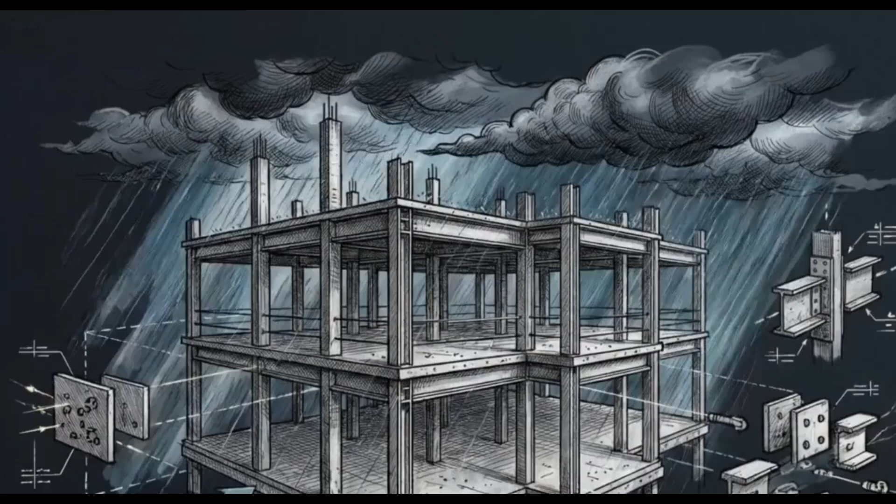A building is never at rest. From the moment the frame goes up, it is locked in a physical fight against gravity, wind, and time.

On a professional job site, these structural principles function as legally binding obligations, moving structural stability from a design choice to a statutory requirement. That legal framework operates as a strict hierarchy.

At the absolute top is the Building Act 2011. This is the ultimate statute in Western Australia, providing the legal mandate that a structure must be safe and compliant.

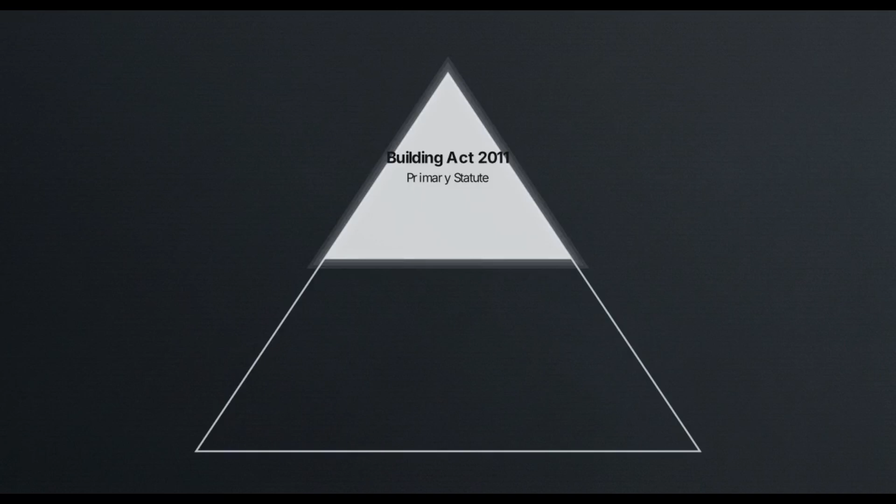Directly beneath the Act are the Building Regulations 2012. These define the exact legal pathways, certification requirements, and conditions necessary to actually obtain a permit.

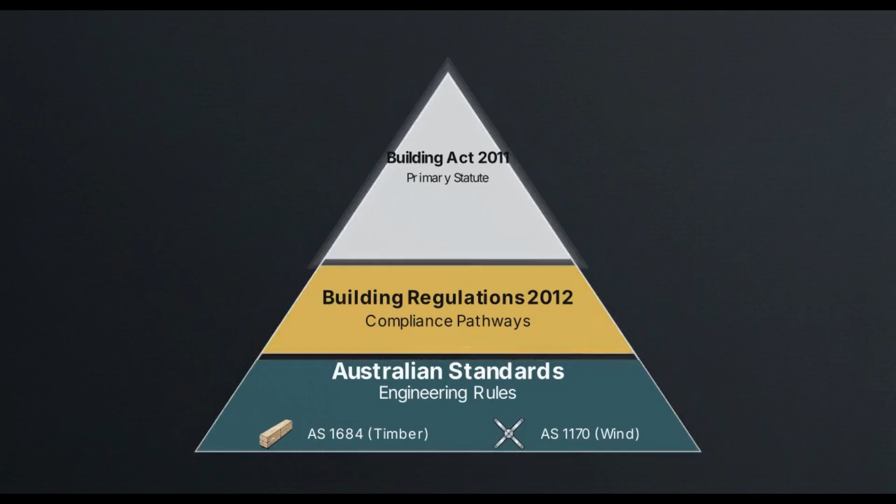Forming the foundation of this pyramid are the Australian standards, documents like AS 1684 for timber framing and AS 1170 for wind actions. These provide the specific, engineered math that dictates how you must physically construct the building to meet the regulations above it. A structure's physical survival on site and your legal survival as a builder depend entirely on satisfying this regulatory hierarchy from the ground up.

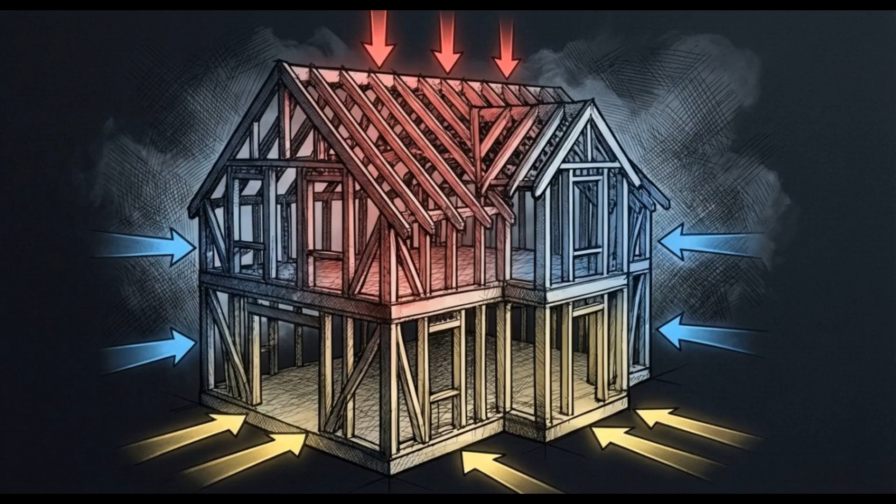To satisfy those standards, we have to quantify what the building is fighting against. In engineering, a force is the action, a physical push or pull. A load is the resulting weight or pressure that the structure actually has to carry.

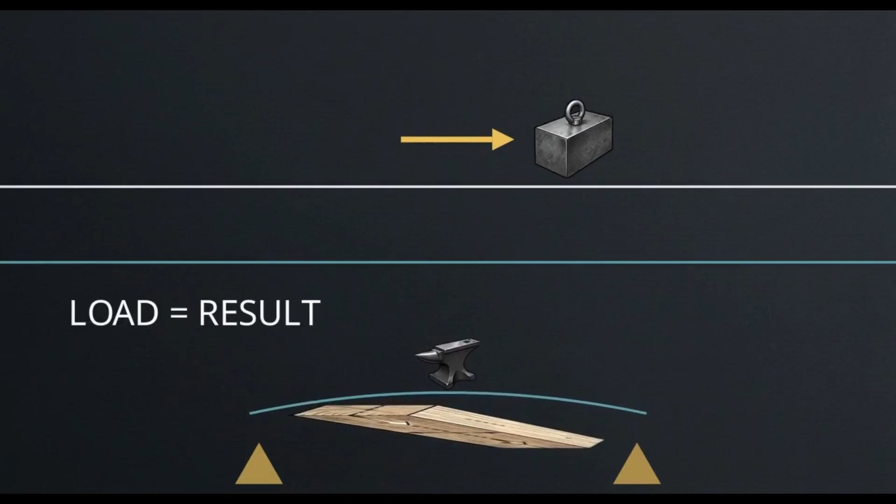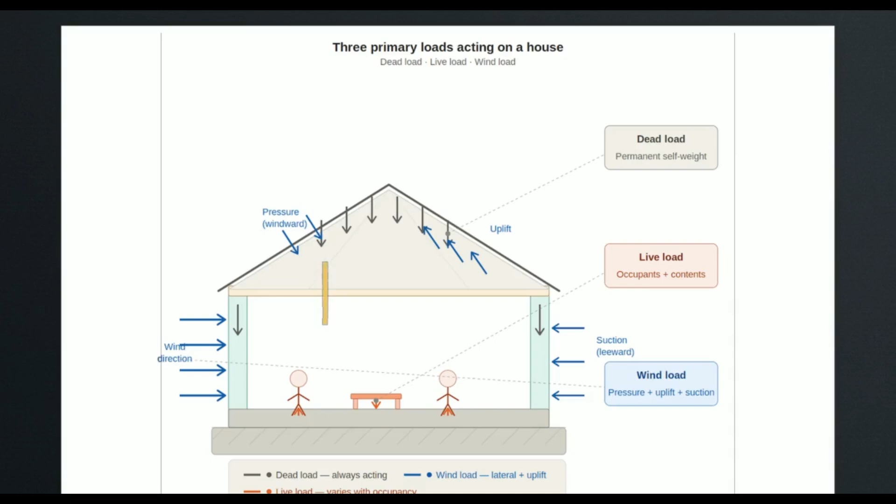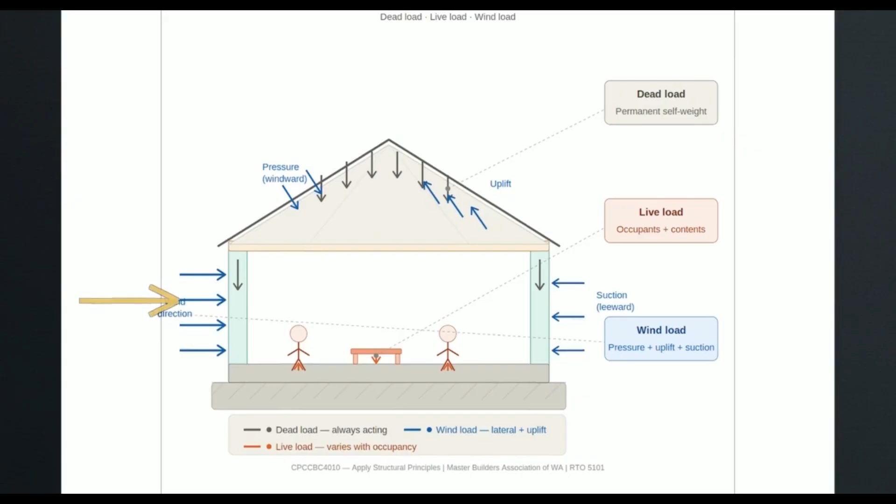Primary loads act on a house as invisible forces that never sleep. Every structure is designed to handle these by default. Notice the specific directionality. The dead load, the permanent weight of the materials, and the live load from occupants both push straight down. But wind load acts laterally, pressing against the walls and creating massive uplift on the roof.

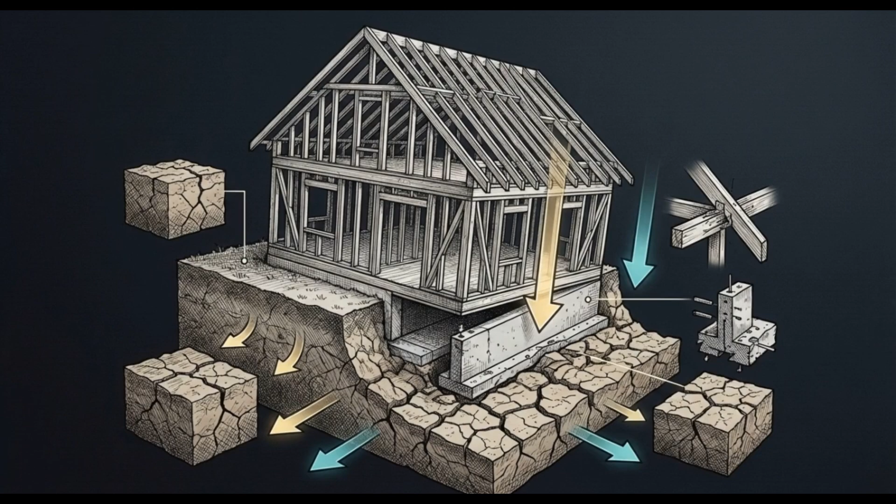For example, building in Western Australia's reactive clay soils introduces severe settlement loads as the ground swells and shrinks. If you're pouring a basement, you must engineer for hydrostatic pressure, the crushing weight of groundwater pushing horizontally against the submerged concrete. A builder's very first responsibility is identifying and calculating the exact combination of these loads before a single trench is ever dug.

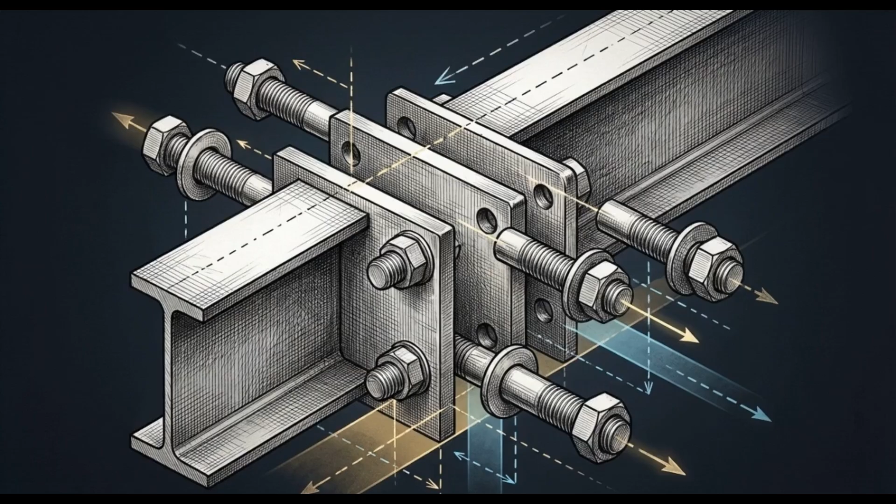Once you know the total load on the building, you have to manage how those massive forces interact at the micro level, specifically at the connections.

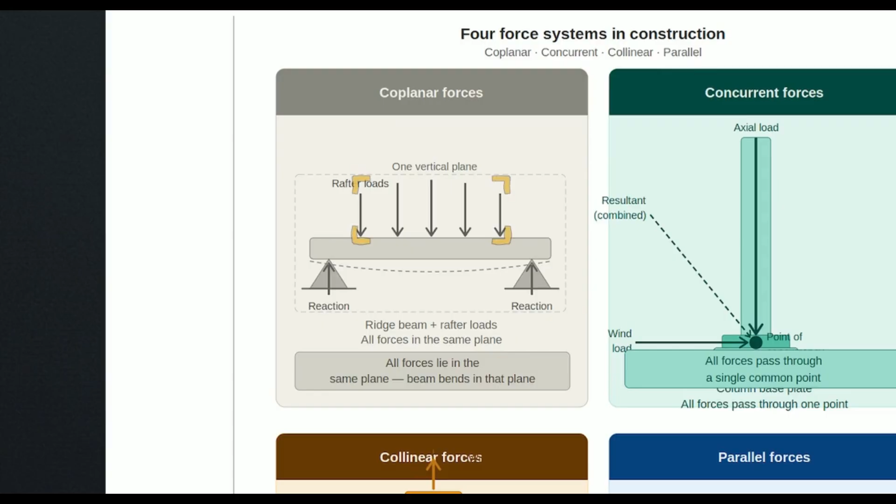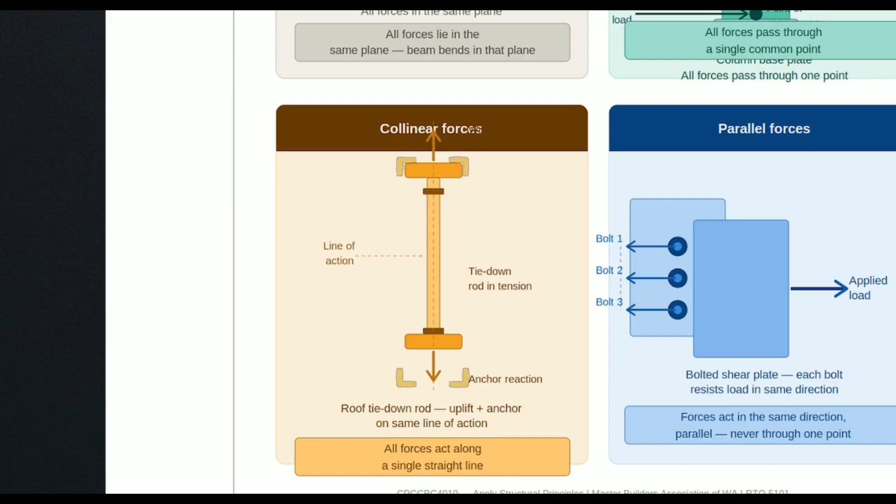Look at the top two panels. When forces act along a single flat surface, they are coplanar, like rafters on a ridge beam. When multiple forces meet at a single base point, like weight on a column, they are concurrent. Collinear forces act in a single straight line, like tension on a tie-down rod against wind uplift. Parallel forces act in the same direction without ever intersecting, which is exactly how a bolted shear plate distributes its load.

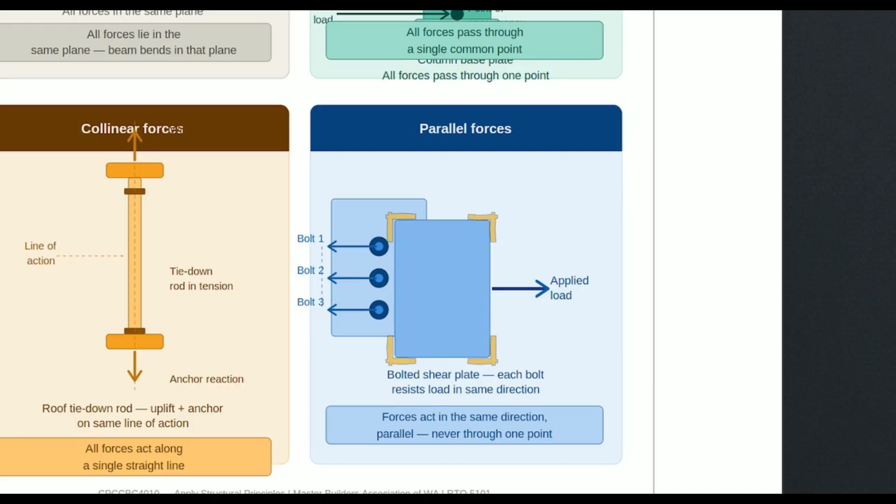Whenever these forces are applied to a horizontal beam, the material will physically bend. This movement is called deflection.

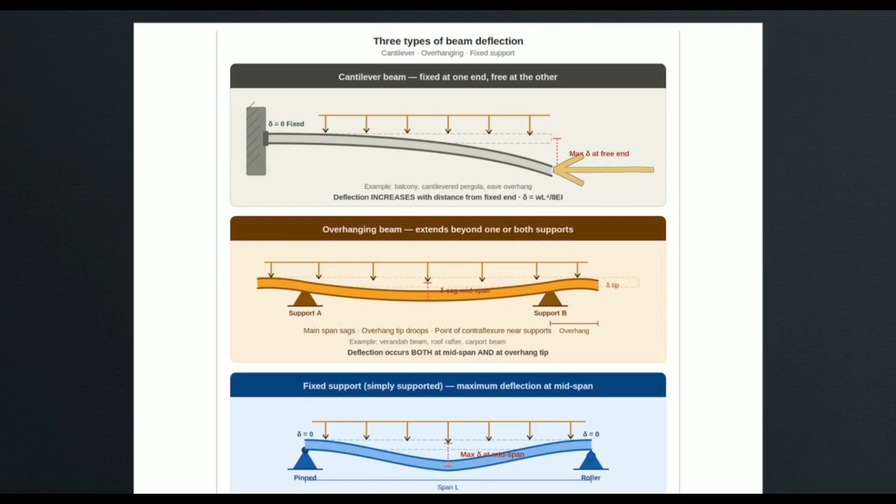This diagram shows a cantilever beam, fixed at only one end. Because the other end is entirely unsupported, the absolute maximum stress and downward movement occurs at that free tip. Contrast that with an overhanging beam, which sags in the middle while the tip droops. A fixed support beam, pinned at both ends, experiences a symmetrical curve, with the maximum deflection occurring exactly at mid-span.

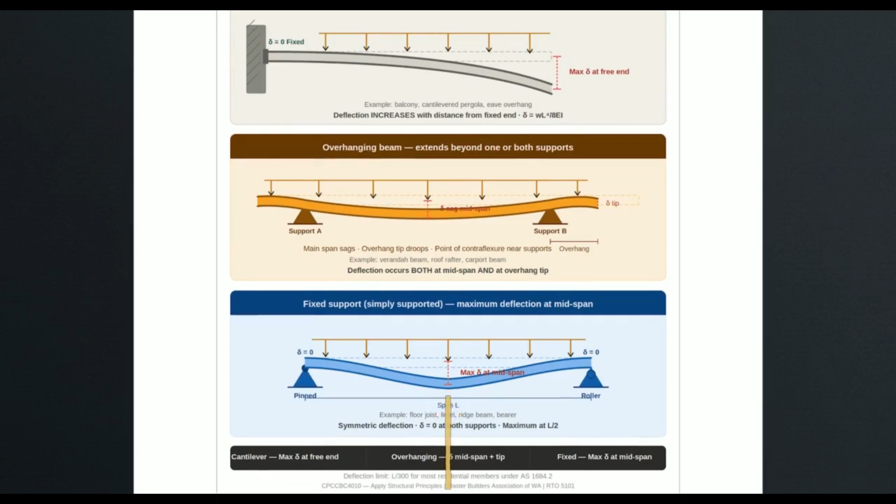Deflection is an inescapable reality of physics. The goal of structural engineering is not to eliminate the bend entirely, but to predict it and restrict it within the strict allowances of the building code.

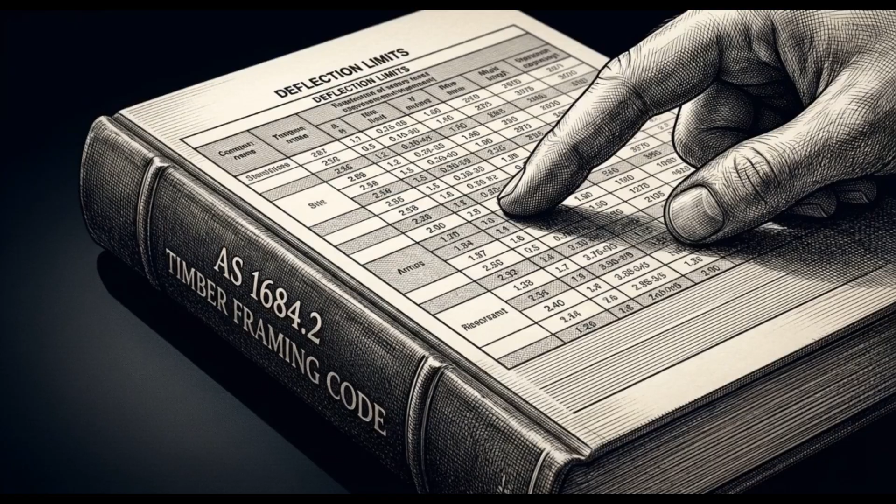To restrict that bending, simply increasing material volume is inefficient. Strength is dictated by geometric orientation. Every beam has a geometric center called the centroid or neutral axis. This is the exact midline where the crushing compression on the top of the beam and the stretching tension on the bottom meet and cancel each other out.

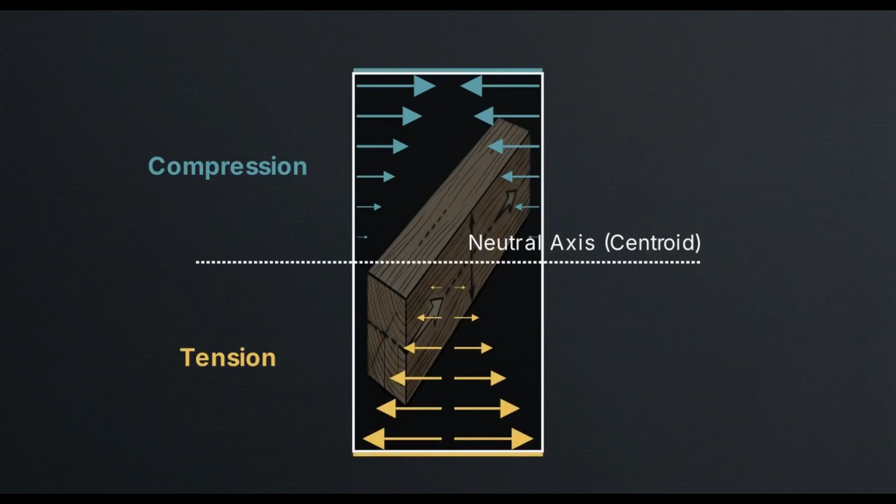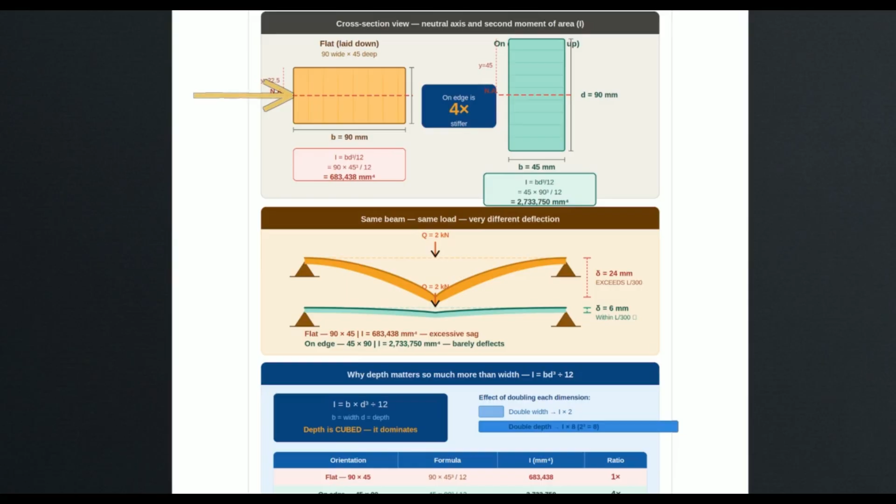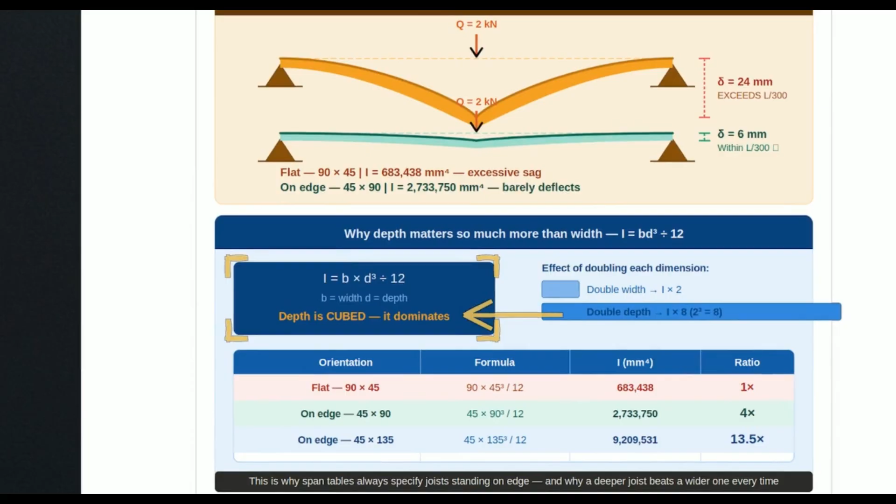The mathematical formula for inertia divides the width times the depth cubed by 12. Because the depth value is cubed, it completely dominates the equation. Rotating that exact same piece of timber onto its edge makes it 4 times stiffer.

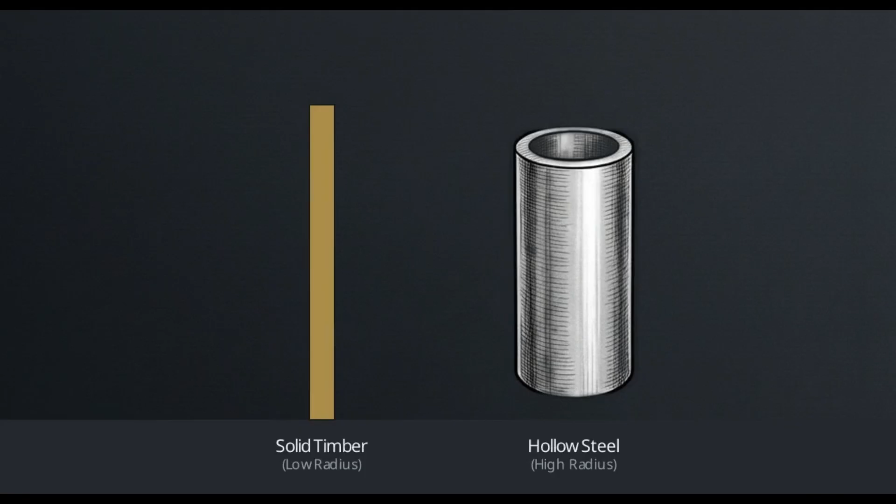A similar geometric principle applies to vertical columns. The radius of gyration measures how effectively a tall, slender column can resist bowing outward when heavy compression hits the top. Manipulating geometry, rather than simply buying thicker timber, is the ultimate secret to structural efficiency and cost control on site.

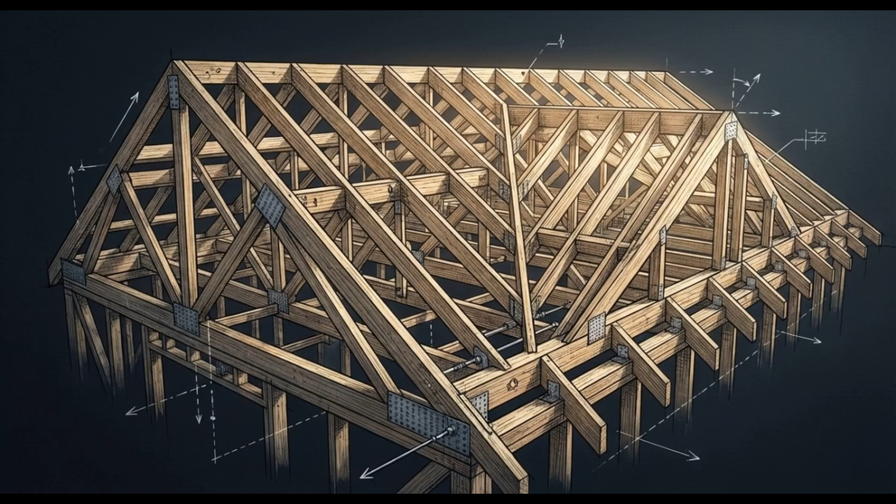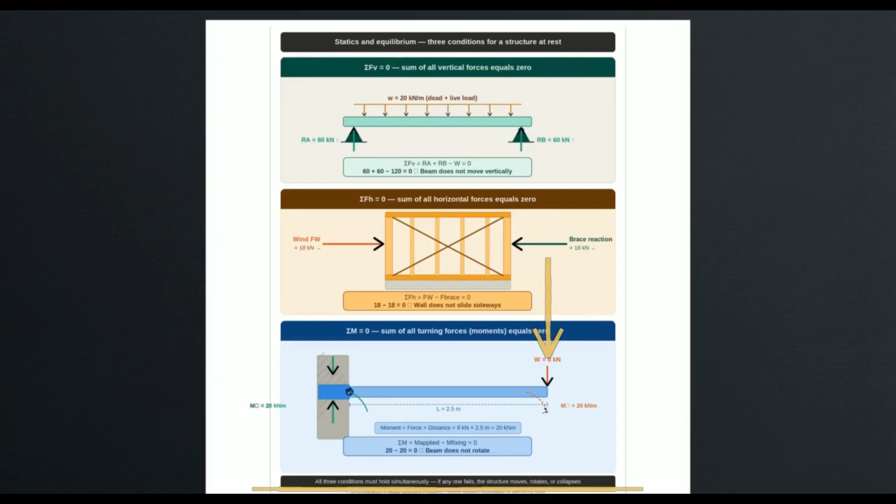Turning moments are calculated by multiplying the applied force, here 8 kilonewtons, by its physical distance from the pivot point, 2.5 meters, resulting in a 20 kilonewton meter turning force.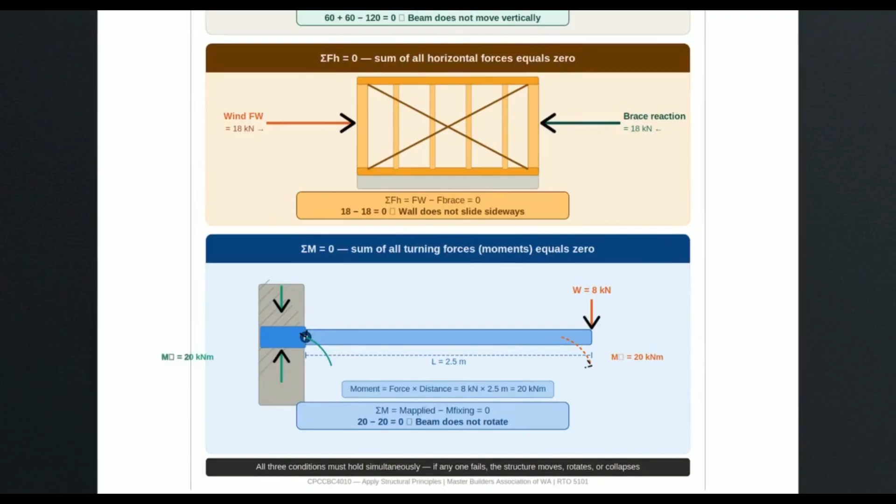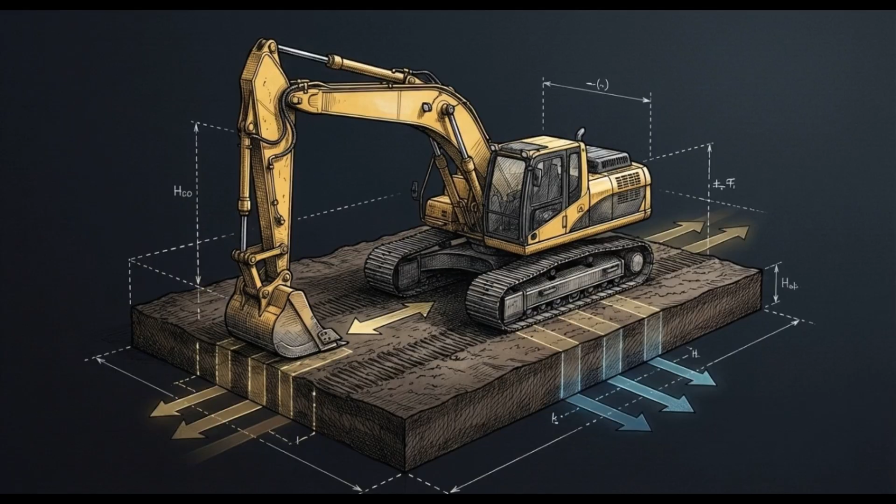These theoretical equations translate into hard numbers on site. For example, a soil base with a bearing capacity of 100 kilopascals can safely support roughly 10 tons of load per square meter. To maintain that equilibrium, building materials must absorb 5 distinct physical stresses: tension, compression, shear, bending, and torsion.

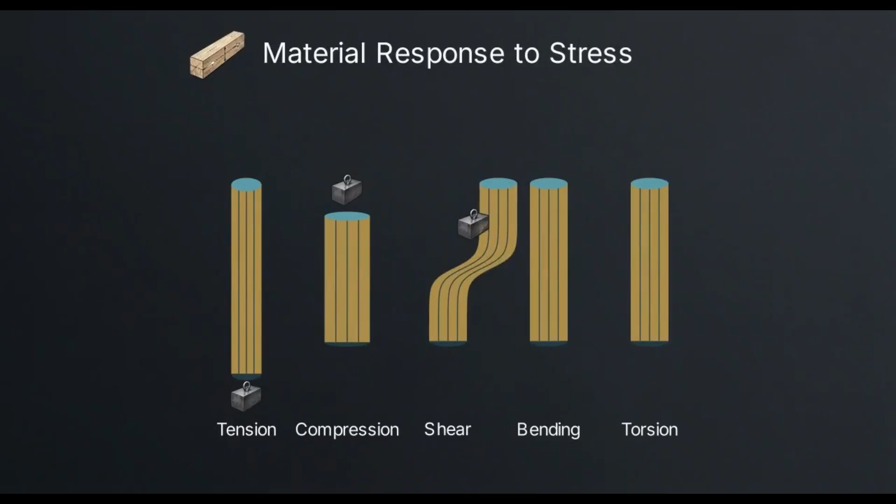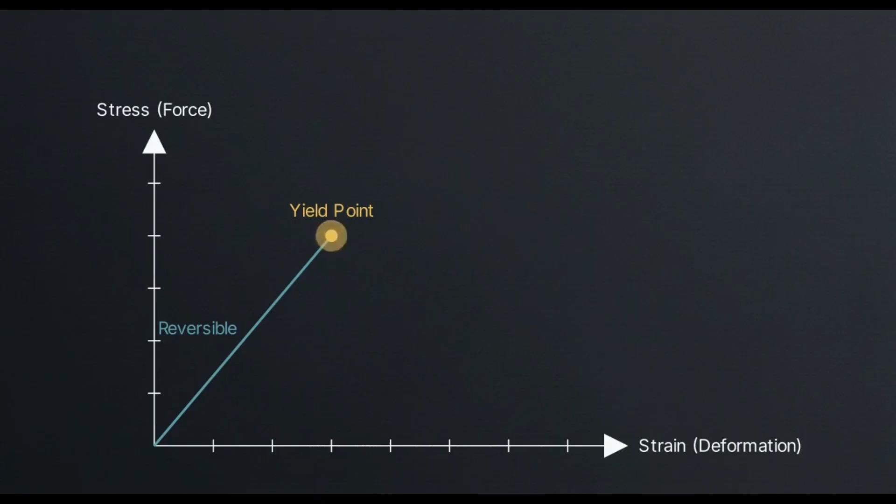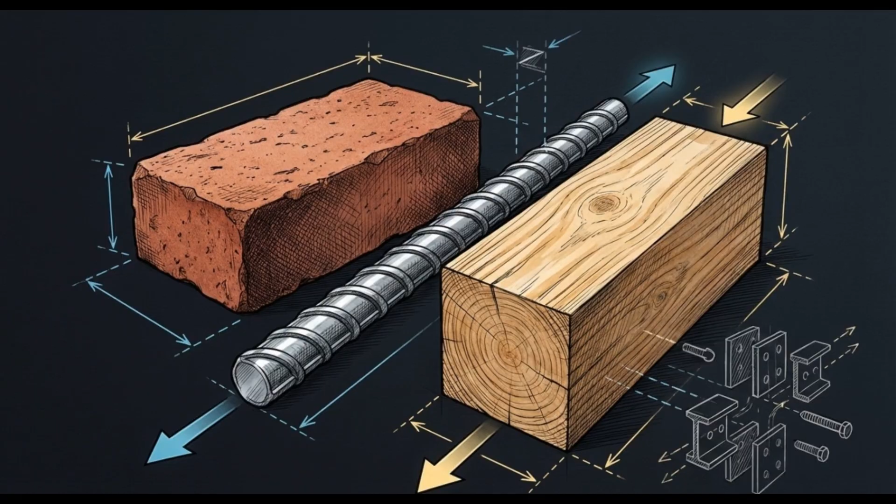Materials map their resistance on a stress-strain curve. Initially, they operate in the elastic zone, bouncing back when the load is removed. But if they cross their specific yield point, they enter the plastic zone, suffering permanent deformation until they reach catastrophic fracture. In construction, there is no perfect building material. Great engineering relies on matching a specific material's yield point to the precise loads demanding equilibrium on your site.

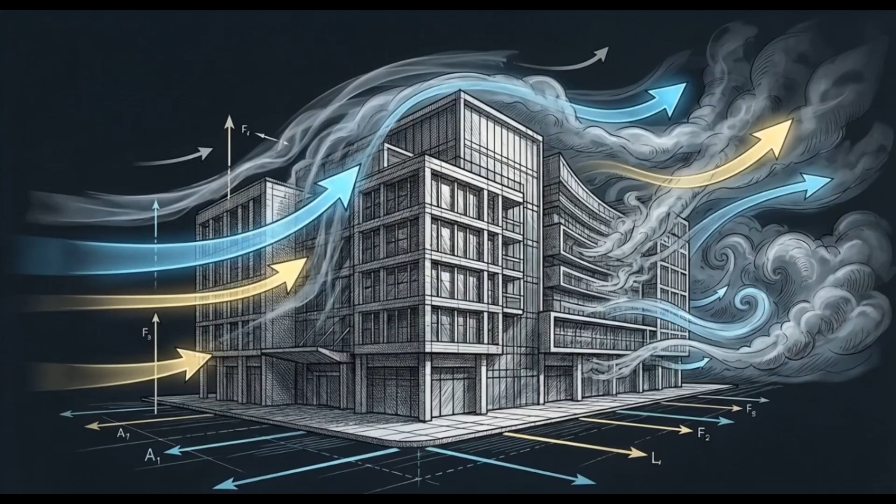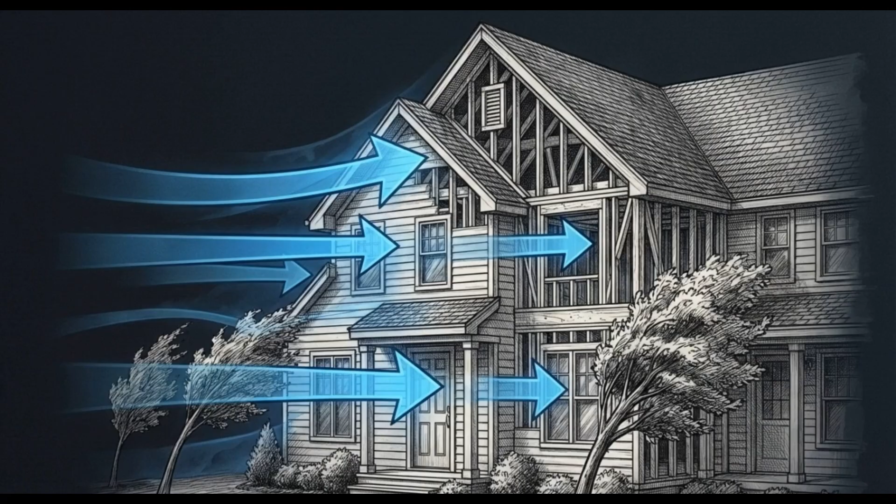Zooming out to the macro level, wind currents create complex aerodynamics as they wrap around the building, effectively transforming the entire structure into a sail. Intense positive pressure hammers the windward side of the structure, while simultaneous negative suction on the leeward side tries to rip the roof entirely off the frame.

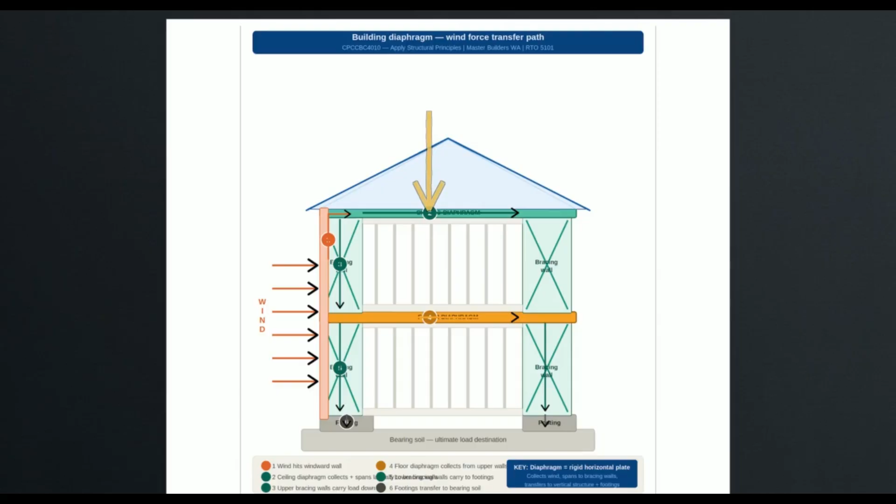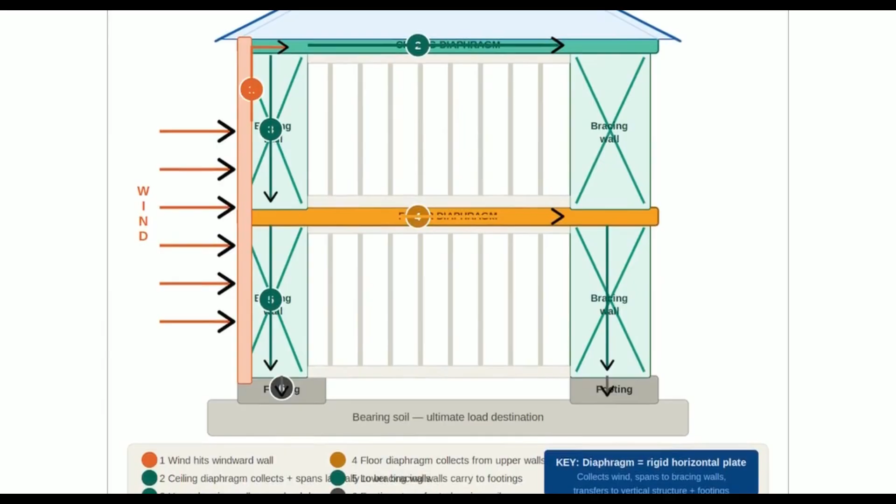This diagram introduces the building diaphragm. These rigid horizontal plates, like floor and ceiling systems, collect massive wind forces. Notice the unbroken load path: wind hits the windward wall, transfers into the ceiling diaphragm, shears down bracing walls, into the floor, and dissipates into the soil. This diagram shows exactly what happens if that load path is severed.

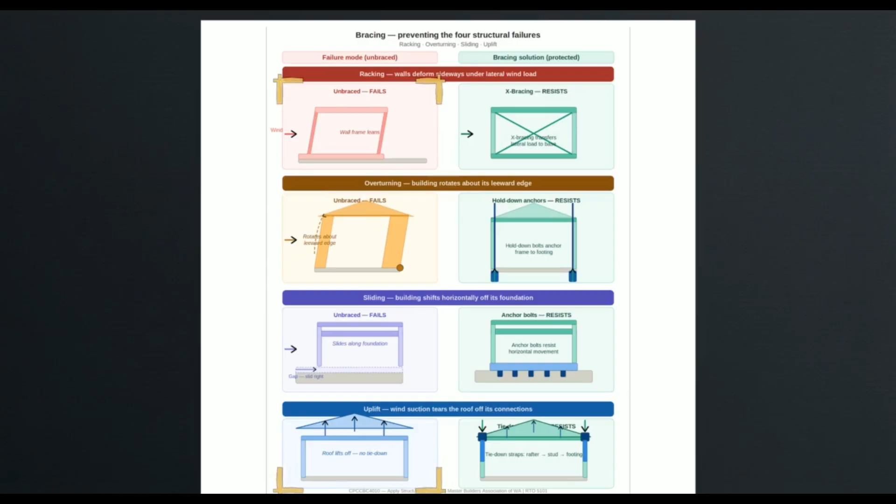The building will suffer one of 4 structural failures: racking, where the walls lean, overturning, sliding off the foundation, or uplift. A fully connected, unbroken load path is the single physical lifeline preventing a structure from tearing itself apart in a storm.

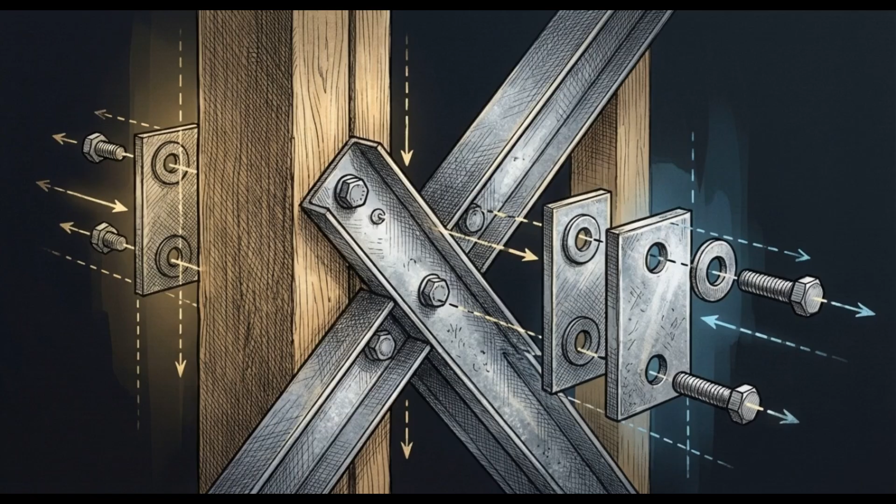We physically combat the failure modes we've identified by installing wind bracing. It acts as the building's structural seatbelt, tensioned elements installed specifically to lock the frame in place.

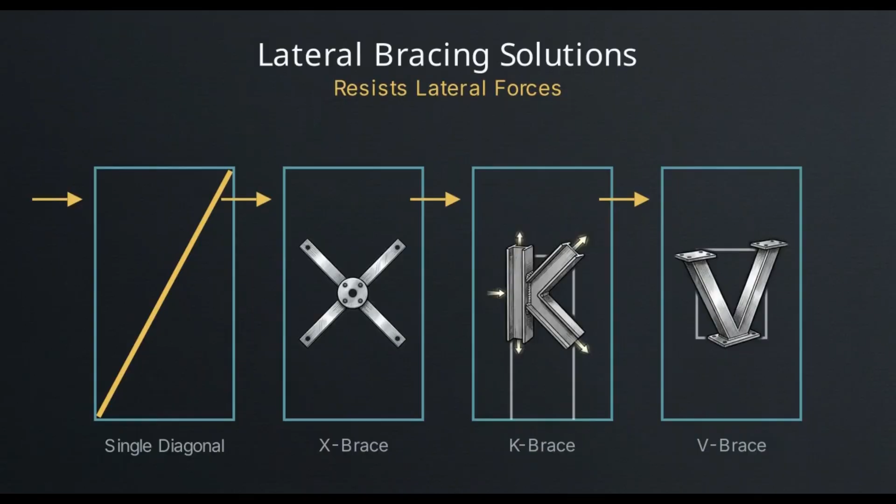The geometry of that bracing dictates its utility. Cross bracing, forming a full X, provides the absolute maximum lateral efficiency. But designs like K-bracing and V-bracing are frequently used to maintain that strength while leaving necessary voids for doors and architectural windows. Perfect geometry still fails if the material itself is weak.

That is why structural elements cannot rely on simple visual timber grading. They require precisely tested, machine-graded pine to guarantee their exact hazard and stress levels.

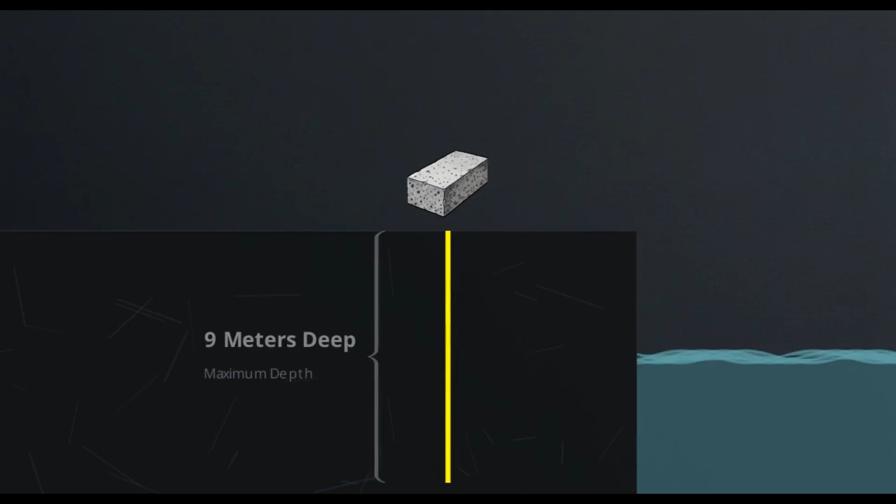Transferring all of these accumulated loads securely into the earth requires serious geotechnical anchoring. Look at this observation platform at the Gap in Albany. To achieve equilibrium against violent Southern Ocean winds, engineers had to drill 9 meters deep straight into the solid granite cliff, securing anchors that hold a 27-ton load capacity each.

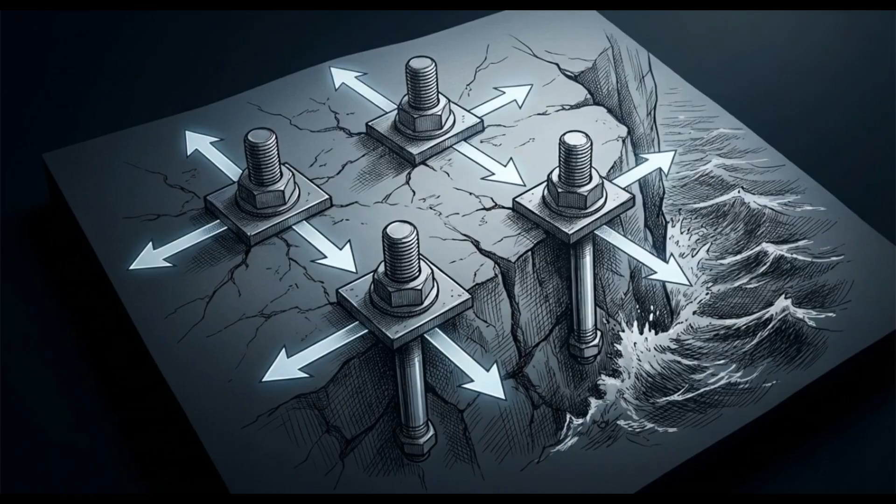Whether bolting a cliffside platform, pouring a gravity retaining wall, or shoring up a deep excavation, the mathematical principles of statics and load transfer remain identical. A building is a living, working system under constant stress. Mastering the physics, respecting the strict legal regulations, and engineering a completely unbroken load path is the definitive difference between a structure that stands and one that fails.